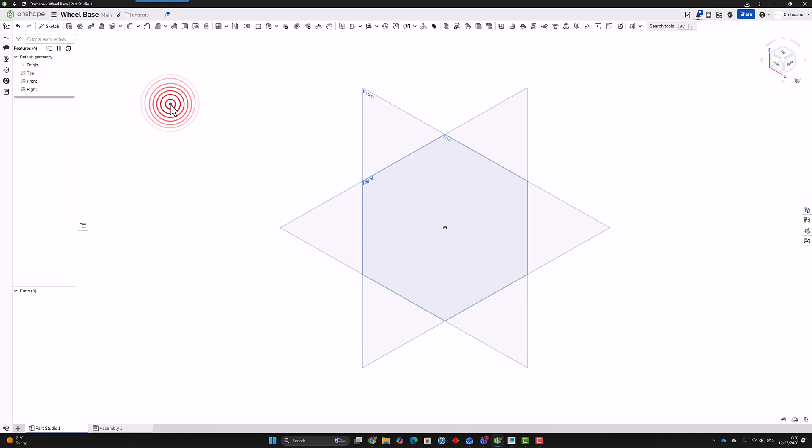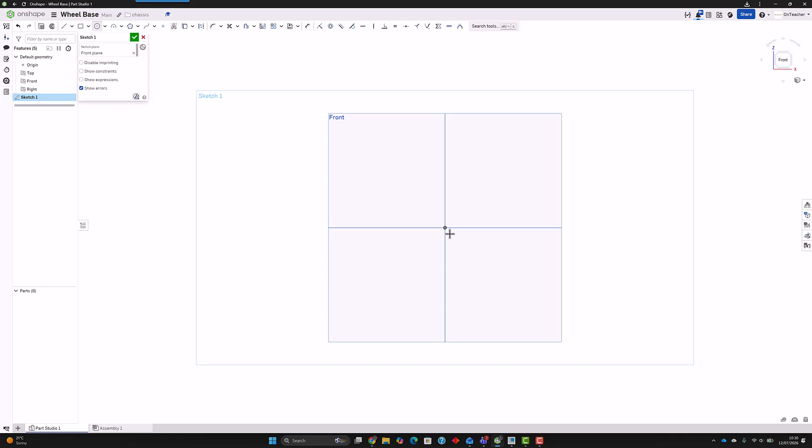So it's left mouse button in red, right mouse button in blue. And we're going to start by doing sketch and clicking on front and then pressing the N key. Now, a Scalextric's tyre is roughly 21 millimeters, so the internal of our wheel arch we want to be 23. If we want it to be a bit bigger, we're going to go with 25. So I'm going to press circle, and above the center to the left of it, I'm just going to draw my circle out and I'm going to type 25.

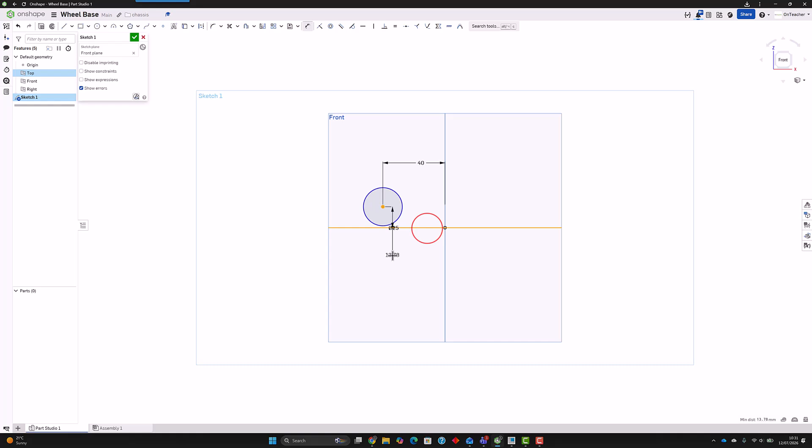I'm then going to set it with a couple of dimensions. So the first one, the standard wheelbase is 40 millimeters from center, so it's 80 millimeters across the top. We're then going to click that line, that one, and change that to 8. So that shows you how much of your tire is going to be running below. So that's the first thing we're going to do.

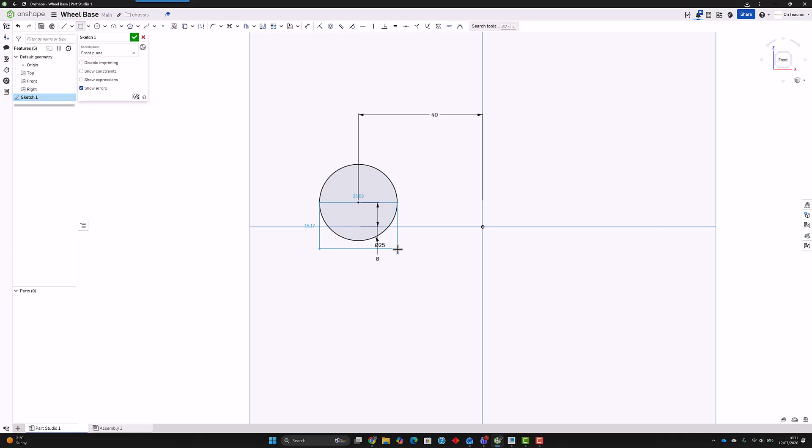I'm then going to use the corner rectangle and go from one side here and try. I've missed it, so we'll just try that again. So I'm going to find that center line there, and you'll see the dotted line comes out. That's what I was missing before. We've got the yellow there and there, and we're going to bring that across. Now my first dimension is of course 25, and the height I'm going to do is 12.5, and everything there should line up.

So I can now go in and delete my parts. Now you will notice the bottom there has gone blue. The reason it's gone blue is we've got no dimension between the top there and that center there. So as soon as I put that in, 4.5.

Now the beauty of this is I can now change my wheelbase. So if I just press escape and click on there, if I want a smaller one, I want a 70, I can change that to 35. I can move it in. So we can go slightly wider, we can do 45. Okay, so that's perfect for changing the wheelbase. So I'm going to leave that there.

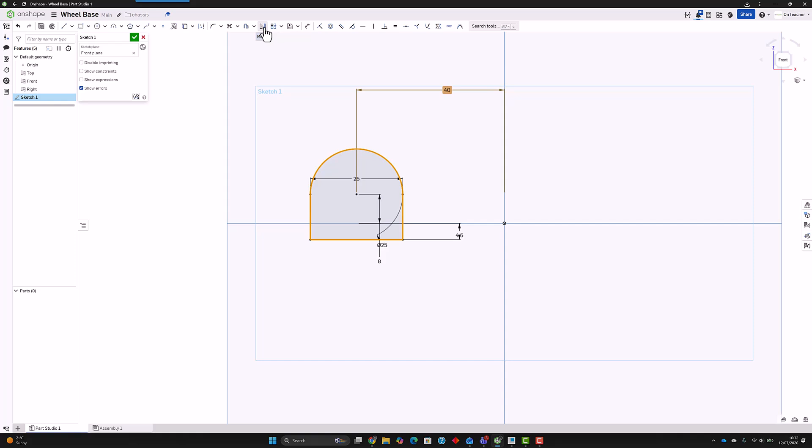I'm then going to just highlight everything here, press the mirror button, and select the mirror line. So I've now got 2. Now again, if I change 1, 35, we've now got from center to center a wheelbase of 70. I'll pop it back to 40. And I'm going to press the tick. Okay, so I'm just spinning that around there.

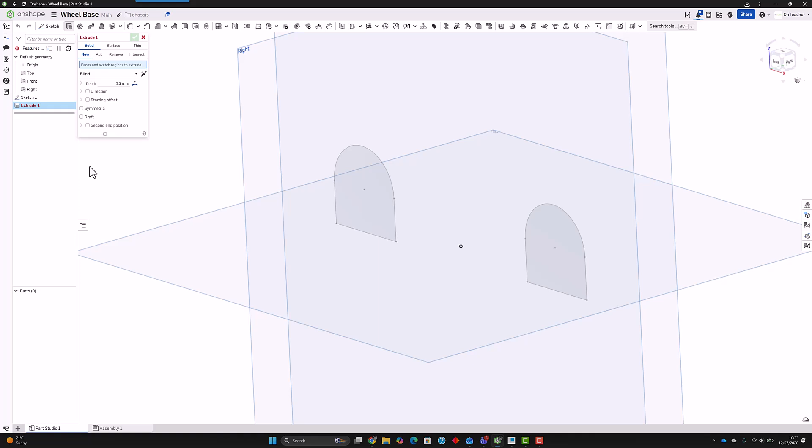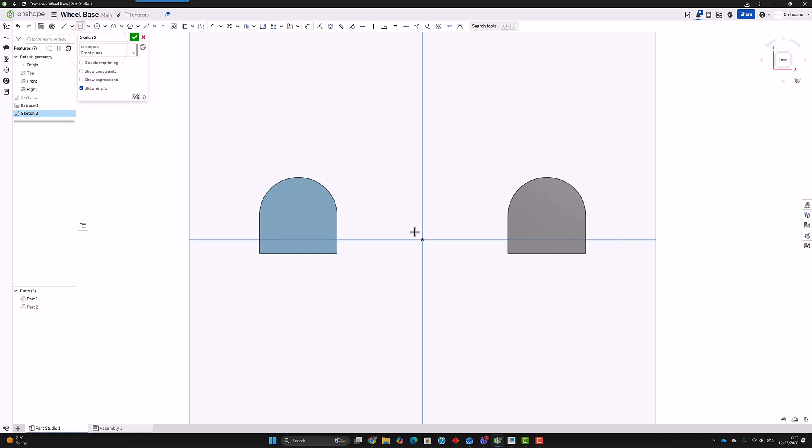We're now going to press extrude, sketch 1, and I'm going to extrude them to 30. Now at the moment it will come up part 1 and part 2. This is fine. We're now going to do another sketch on the front. Press the N. And I can do this as a center point rectangle. But I want to go above the point now. We'll sort out the center in a minute. And I'm just going to run that straight the way through.

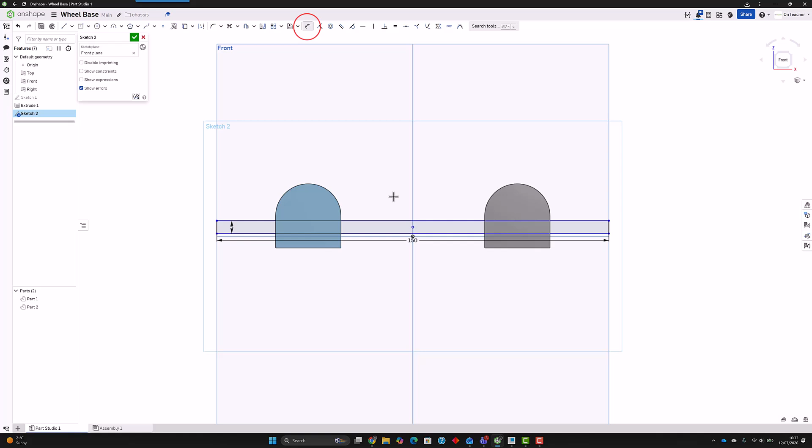Now it's going to be 5 millimeters. Now your maximum here, pardon me, is 150. Your maximum. It doesn't have to be 150. I mean, 150 takes us to there. So that's your maximum. And all I'm going to do now is just click that line and type in a 0. And that's the start of my wheelbase. I need to press the tick.

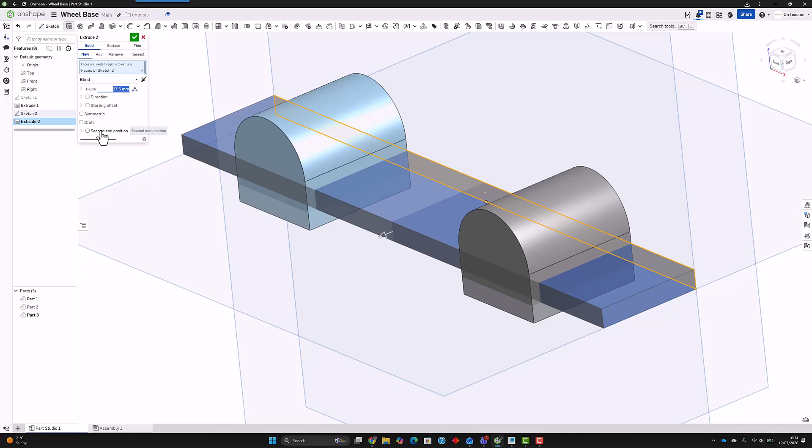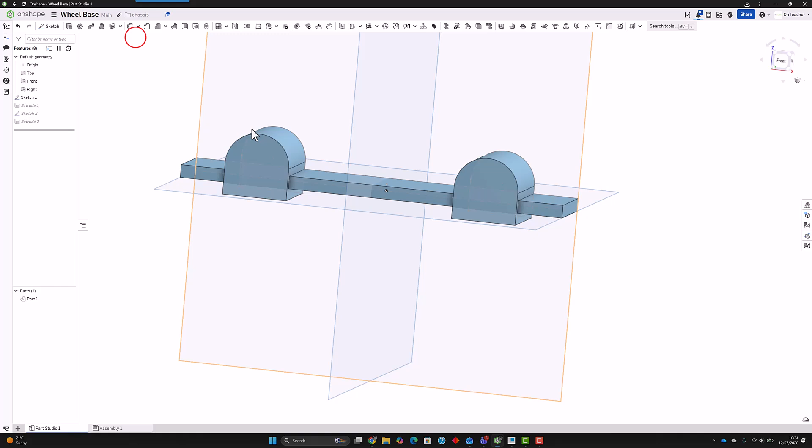I'm going to click extrude, sketch 2, and we'll bring that out to 27.5. And now I'm going to then do add, merge with all, press the tick, and we've got our wheelbase. And again, if I go into sketch 1, I change that to 35, the whole thing updates. So it's just that one dimension now that you need to change to create your wheelbase. So that's part 1 completed. We did that in under 5 minutes.